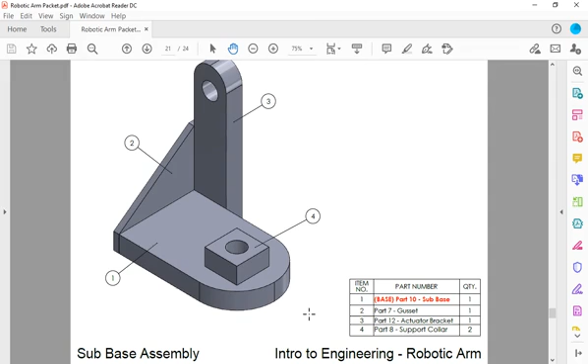As far as inserting the parts, the one thing you need to remember is the first part that you insert into the assembly is called the base part. The base part never moves, it's stuck in place, and all the other parts will move in relation to that base part. So you can see in this drawing, I've labeled Part 10 as my base part.

So I'm going to insert that part first. I'm going to find Part 10, and you see the part shows up, and then you can just click and it's going to place it inside your screen.

Now the good thing about assemblies is there are fewer buttons that you need to click on. We're just going to be operating out of the assembly tab, and the only 2 buttons we really use are insert components and mate. That's all we'll be using for this video.

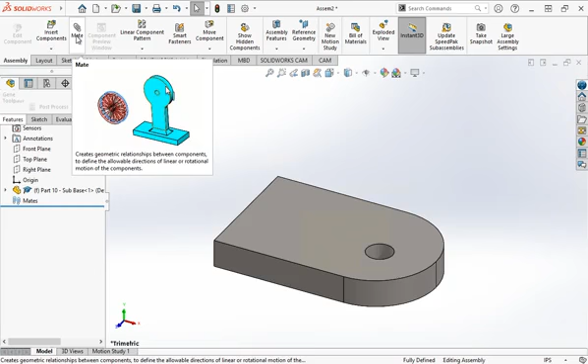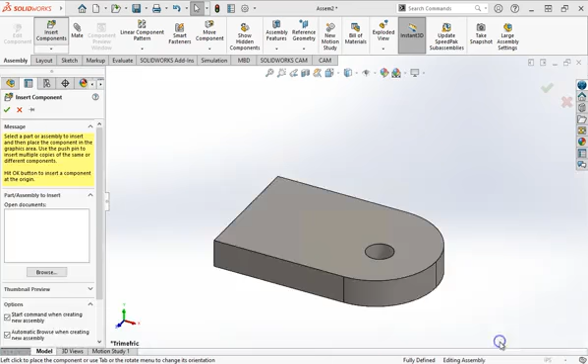Next thing we want to do is insert the rest of our parts. So I'm going to go up here to insert components, and we'll get this window that pops up again. A quicker way, instead of doing each one individually, you can hold down the control button and select all the parts that you need. So I'm going to select Parts 7, 8, and 12, and then go ahead and open up all those parts.

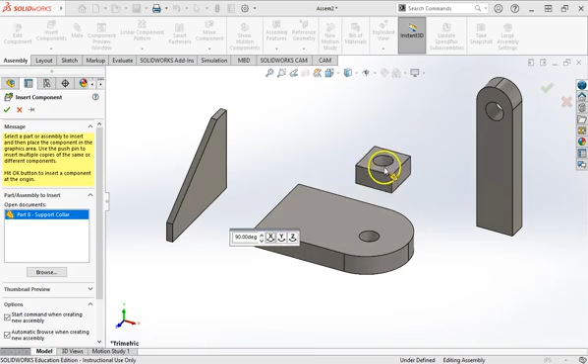One little thing you may want to keep in mind: if you have a part that's on its side, or maybe upside down, you can adjust and rotate that part around. You'll see in the middle of the screen there are these little rotate icons, and if you click on those it allows you to rotate your part around. So that's fine, I'm going to place that there.

So if we take a look at these 4 parts, what you'll notice is pretty much all the parts move around except for our base part, which is Part number 10. This part is fixed in place and it's not going to move. All the other parts will move.

So the idea with assemblies is that we have all these parts that move around and we want to stop them from moving. We do that by adding what are called mates. Mates are these laws, these little rules that you apply to your assembly. It can be something as simple as I want this face to be stuck to this face. Usually it's going to require 3 mates for every single part to cover the 3 dimensions of that part, or the 3 freedoms of movement.

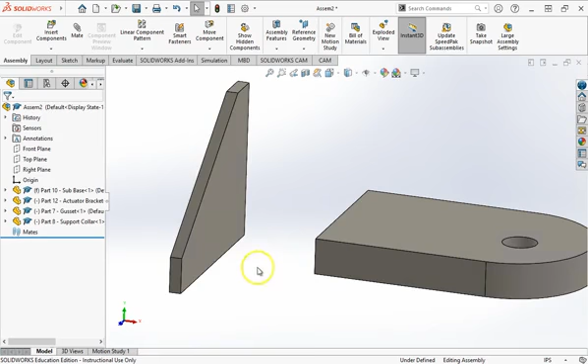For this assembly, I'm going to start off by scooting these to the side a little bit, and I'm just going to start with this part over here. If you're doing assemblies, it's really good to have a mouse so that you can rotate around, because with assemblies you have to do a lot of rotating and moving things around. So the first thing I'm going to do is stick this face to that face right there.

And how you do that is you're going to go up into the assembly tab and look for the button called mate. I'm going to click on that. Now you'll notice when you open the mate button, on the left side of the screen there's a whole lot of buttons to click on, but we're not really going to be operating a lot with these buttons.

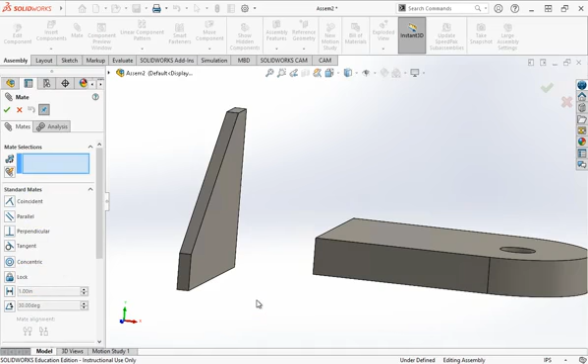Most of what we're going to be doing is just clicking on faces and then hitting the green check. So I'm going to stick those two faces. I'll start by clicking on this face, then rotate around and click on this face. What it's going to do is stick those two faces together. So when I click, you can see it moves the part over, and we get a little window up here, and we can just hit this green check. So you see those faces are stuck.

Now the part still moves. It can still go up and down and left and right, but those two faces are stuck together.

Now, one thing to keep in mind is sometimes you'll do a mate, but it doesn't look like you did. For example, I stuck these two faces together, but if I move the part up, it looks like I didn't do the mate because the faces aren't physically touching. But if I change my view, say go into front view, you can see that mate still exists. What that mate is doing is simply preventing us from moving this part left or right at all, so even though the part isn't technically touching the other part, that mate is still active and still exists.

So the next mates I'm going to do are called flush mates. What they do is they don't stick two faces together, they take two faces and make them flat with each other. For example, I want these faces here to be flat with each other. I don't want this face sticking out like you see right now.

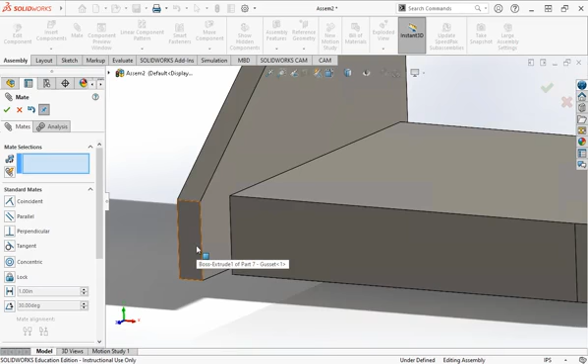To do this mate, it's very similar to the last one. We're just going to click these two front faces, and it's going to make them flat with each other. So I'll click this face, and I'll click this one, and you can see it slides the part down so that now those two faces are flat with each other.

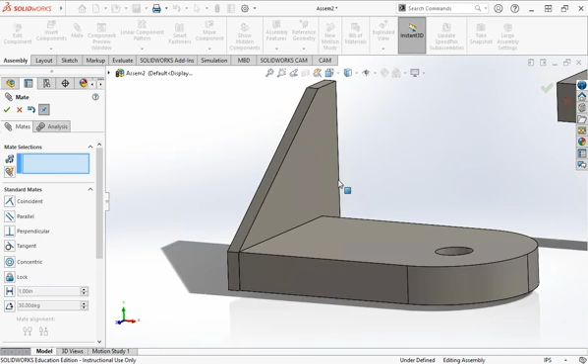So if we take a look at our part, we can see it still has one more freedom of movement. When we started this out, the part could move all over the place, but now we're at the point where our part only moves up and down, and that's it.

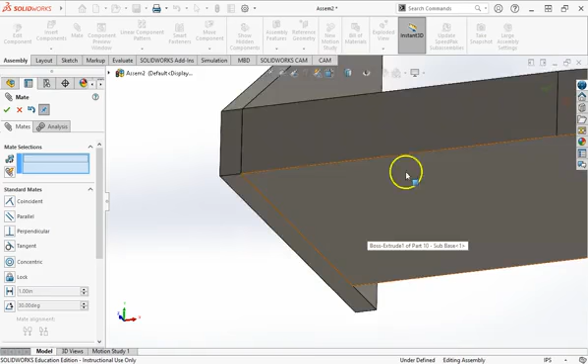So to fix that, I'm going to rotate to the bottom of this, and I'm going to do another flush mate, making these bottom faces flat with each other. So I'll click this face and this one, and now we've done our three mates.

So if we try to move this part, you'll see it does not move at all. What this means is that this part is now fully defined. It can't move anywhere, it can't move up, down, left, right, forwards, and backwards. So this part is now finished.

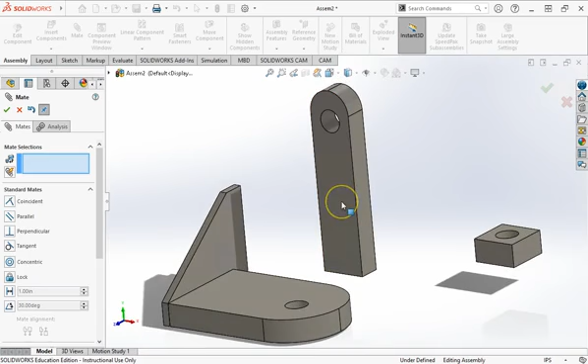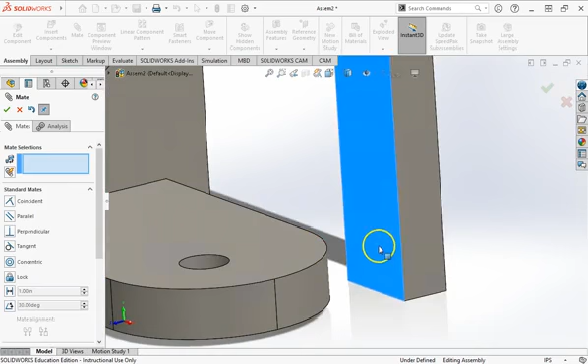So let's move on to another part. I'm going to take a look at this part right here, part number 12. I'm going to try to scoot that out of the way and stick this part in this little pocket you see back over here. So first I'll stick some of these faces - I'm going to stick this face right here, and stick it to this back face over here, and then green check.

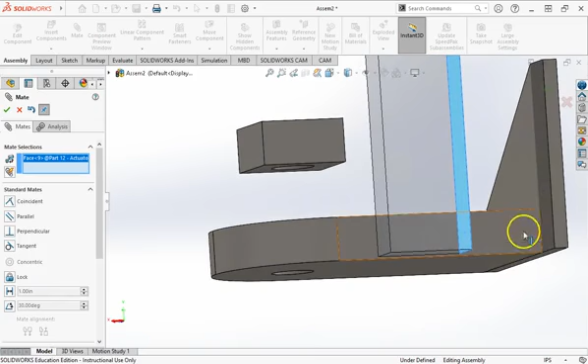All right, and now what I want to do is I want to kind of get it in that little pocket right over there. So let's do another one of those mates. I'm going to take this face, and I want to stick it over here, then green check. And just like with the previous part that we did, we see it moves up and down. So we need to stop it from doing that. So I'm going to go to the bottom of our assembly, and I'm going to make these two faces flush with each other like that.

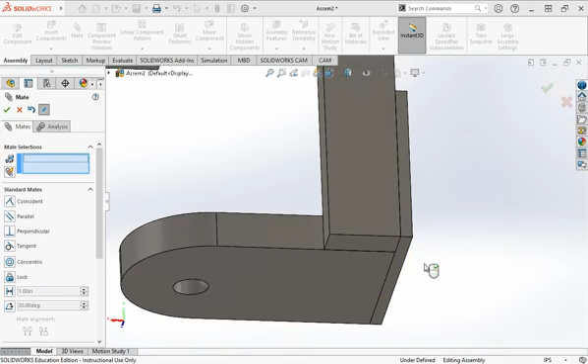Okay, so what we got so far, we've got part 7, does not move, it's fully defined. Part number 12 doesn't move either, it's fully defined. And we just have one part left. Now this one's a little bit different because there's a cylinder. We got these two holes. And this is what's going to be called a concentric mate.

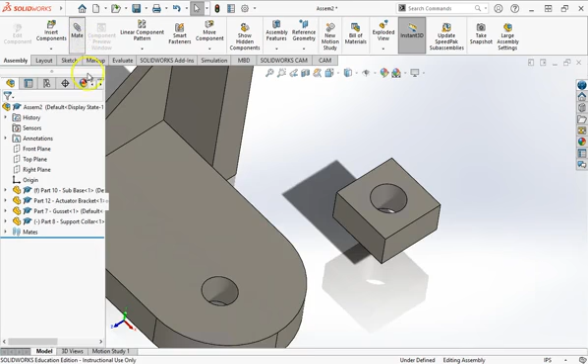This is where you take two circular features, and what it will do is it will align the center points of those circles. And it doesn't matter if one circle's bigger or one's smaller, it will find those center points and align them together. So the way you do this, I'm going to go mate, and I'm going to select these two holes here. Now it is important whenever you select these, make sure you know the difference between selecting a circle and a cylinder.

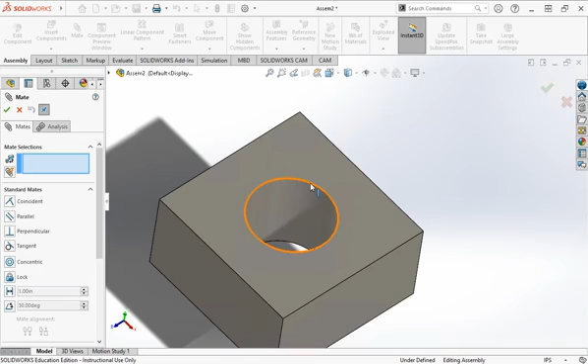So for example, this right here, what I have selected right now, that is the cylinder. That's what I want to click on. What you don't want to click on is that. Okay, so what I have selected right now, see, that is just a circle. That's a two-dimensional feature. This is the cylinder. That's a three-dimensional feature, so you always want to select that.

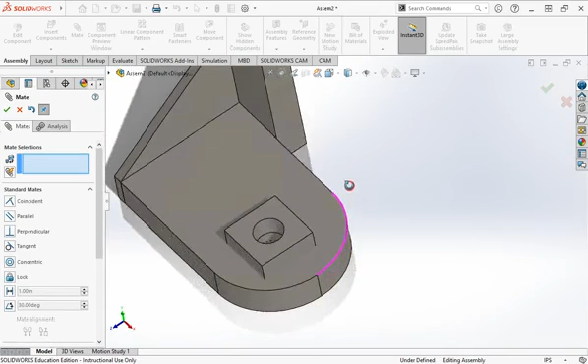So I'm going to click here, and then I'm going to click this cylinder, and what it's going to do is it's going to move those parts so that those two circles are aligned. And then green check. And we can see it aligned those two circles. So once again, let's kind of move this around. Let's figure out what else we need to do.

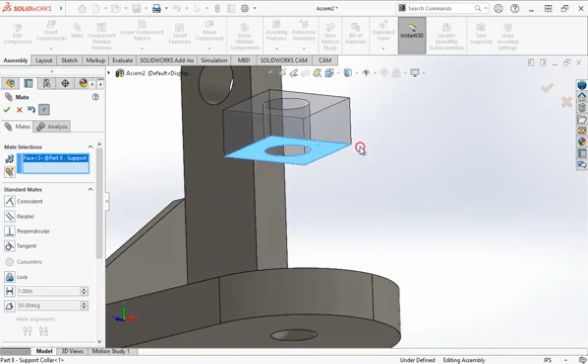So I think the next thing I'm going to do is I'm going to stop this part from moving up and down. And how I'm going to do that is I'm going to have to rotate, and I'm going to click on this bottom face here, and I want to stick it to this top face on part 10. So let's click on that, scoots down, and then we can hit enter. So once again, let's see what's going on. So right now the only thing that's left is the part is rotating.

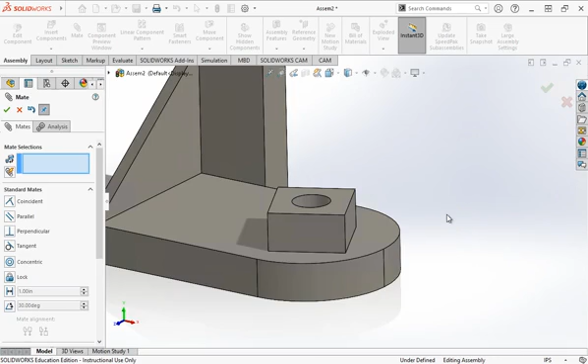To stop the part from rotating, you're going to have to do what's called a parallel mate. A parallel mate is a little bit different. What you do is you're taking two faces that are far apart from each other, and like one of the faces is crooked, and you're going to take those two faces and you're going to make them face the same direction. And how you could do that with this part is I could take this face over here and I could mate it with this face.

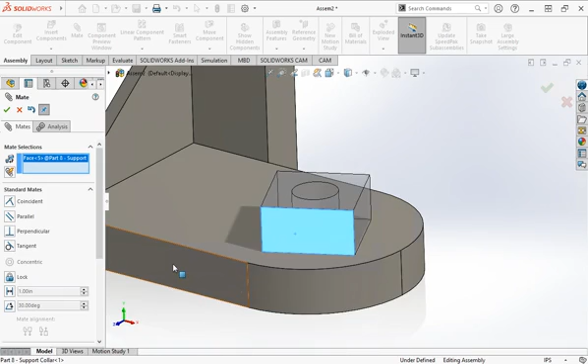Now you may think that looks kind of similar to what we did earlier with the flush mate, but the face that we just selected, that part's not going to move at all. It's stuck in place right now. All it's doing is rotating. So when I click this face, it'll rotate that part so that those two faces are now parallel with each other. So let's green check.

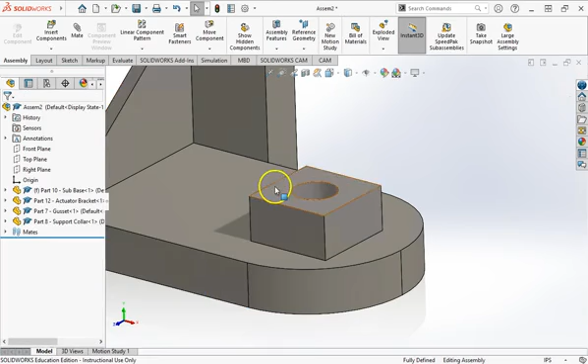So whenever you finish an assembly, the last thing you want to do is you just want to kind of go over your part and see if anything moves. And we can see nothing here moves. And pretty much if nothing moves on your part, if everything is stuck in place, then that means that everything is fully defined and that your assembly is done.

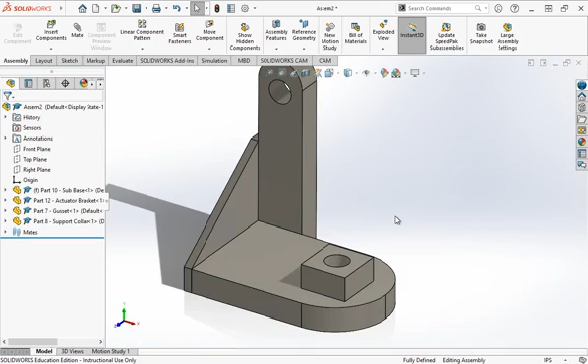So assemblies can be a little bit tricky. It's a lot different from building parts. I always compare assemblies to something like making puzzles. It can be kind of difficult because there's a lot of visualization that goes on. But I hope this video helped.